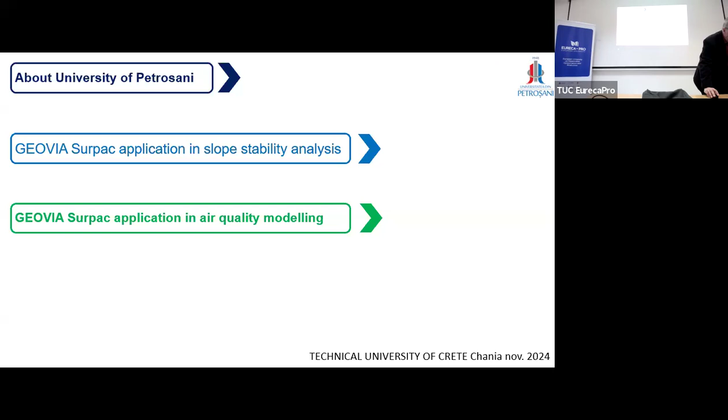So now we are here in Technical University, and I am 1,500 kilometers away from Petrosani, which is a town in the southwest center part of Romania. We hope you didn't drive all this distance. No, only by Google map - my car was an airplane. Because it's really a long trip, and now in Petrosani it's about 20 centimeters of snow.

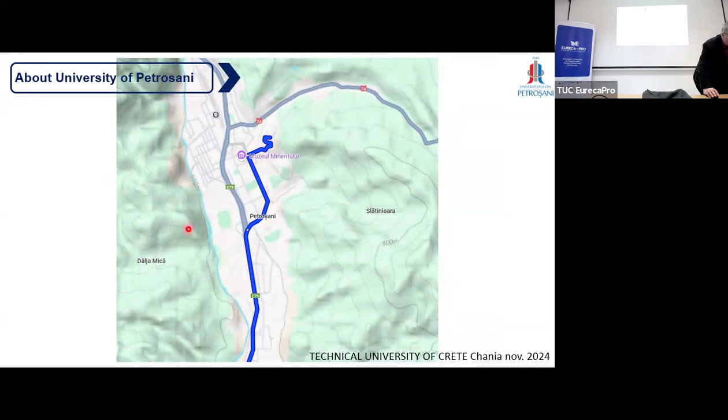Our university has functioned in Petrosani since 1948. The name of the university was changed in different periods of time. From 1957 it was named Mining Institute of Petrosani. From 1991 to 1995 it was named Technical University of Petrosani, and since 1995 we are University of Petrosani, because we have in fact three faculties which deliver various bachelor specializations.

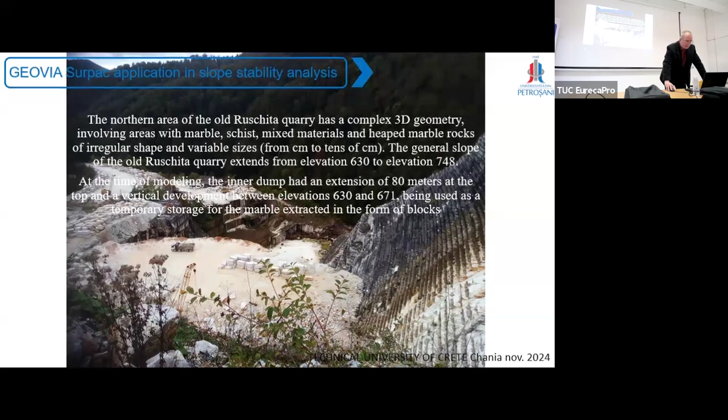For the stability study, we used Slide 3 from Rocscience. I don't know if you work with it - Rocscience has a large package of dedicated software.

So using Slide 3 involves several steps. One step is building the geometry. There are some tools inside Slide 3 for building the geometry, but these tools are not quite comprehensive to cover all the aspects. And if the geometry is very complicated, there is another way.

The geometry could be created with other modeling software and then imported into Slide 3. So in fact, we did this using version 6.9 of GEOVIA Surpac.

For building the geological model, we used a lot of various sources of information. And for completing this information, we carried out 2 exploratory drills.

One is a vertical one from the elevation 734, and the second one - one is a vertical one, and the second one is a horizontal one at elevation 688.

You could see here the core recovered from this exploratory drill. From this core, samples were made for mechanical testing in the laboratory.

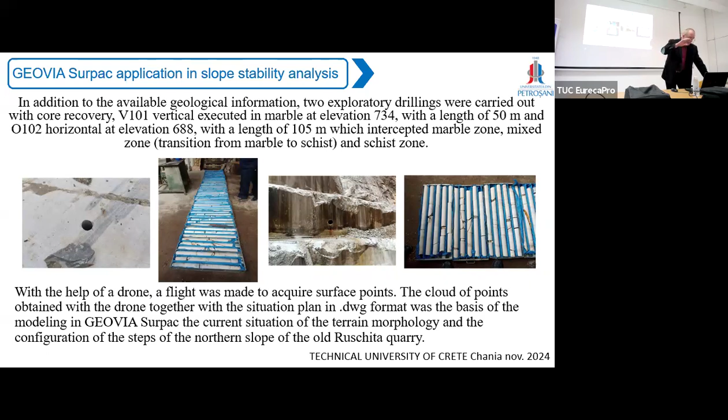Also, for modeling the morphology of the area, we used a drone, and the information, the points surveyed with the drone, were then imported into Surpac.

So this is the model generated based on the points from the drone, and here you can see where the vertical drill hole was carried out, and over here you can see the horizontal drill hole. And on the right is a helicopter view of the same area.

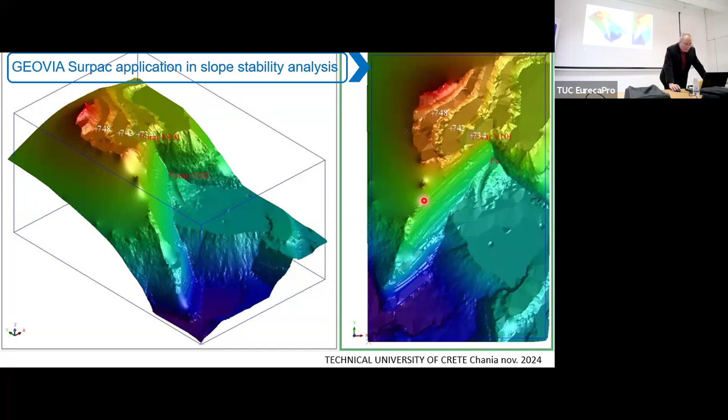So, based on the information acquired during the process of documentation, we were able to create the model of the separation planes.

This one is the separation plane between schist and mixed material, and this one is the separation plane between mixed material and marble. And you see where the exploratory drills were carried out.

In order to import the model into Slide 3, we created a virtual box, and all the elements were cut to the level of this box.

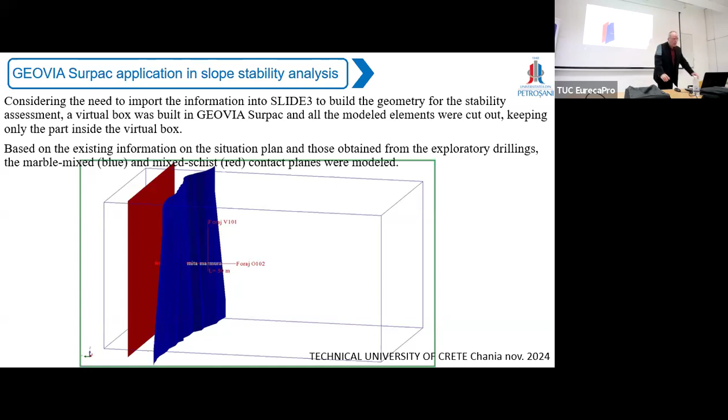Part of the slope is not visible now because it's covered with inner dump. In order to create a model of this part, we used all the situation plans with elevations and limits.

Finally, we were able to create the geometry of the area, and practically our geological model had four solids. One solid represents the marble. The second one represents the inner dump, which now partially covers the slope. The third is the schist model behind the marble, and the fourth is the mixed zone.

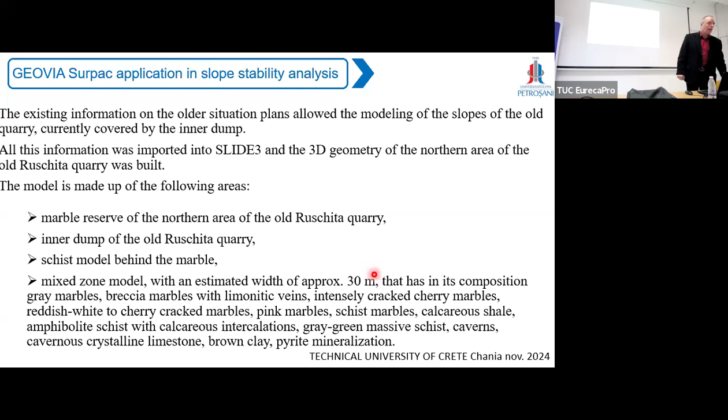We estimate that the mixed zone is about 30 meters wide. In the mixed zone, we identified different types of materials.

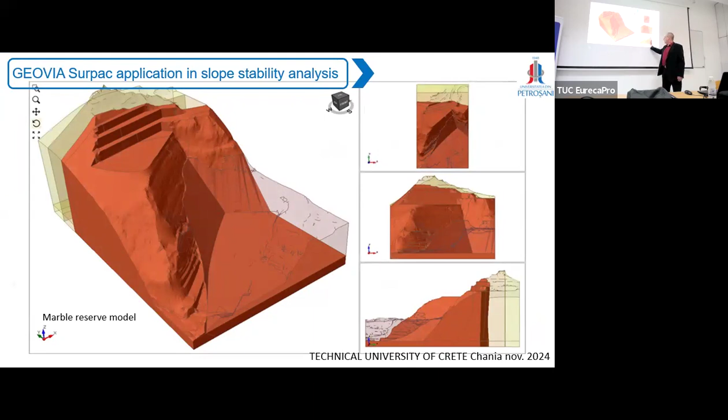And the result in SLIDE3 is this. This one is the marble model. You see, this is a 3D view, and here we have the views along axis. Here you see the extension of the marble.

The second one is the inner dump. You see that the inner dump covers the slope here. I showed you the slope on the first picture, but now it's not visible.

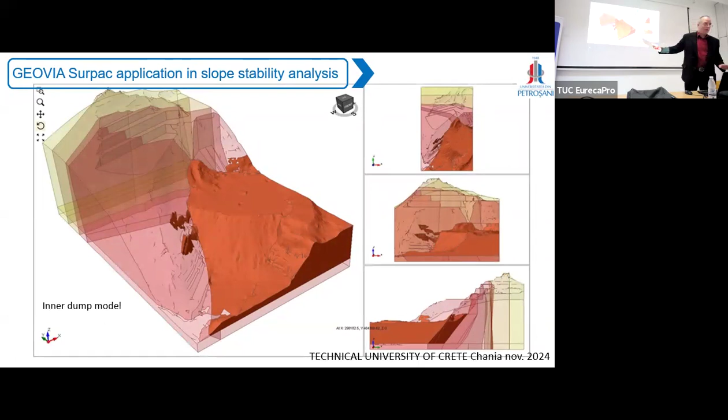The third one is the schist model, which is practically on the backside of the quarry through the mountain. And the fourth one is the mixed zone, which is between marble and schist.

The result of processing all the information shows us that in the inner dump area, it's the lowest factor of stability, 2.6. On the slopes, the factor of stability reaches over 4, and so on.

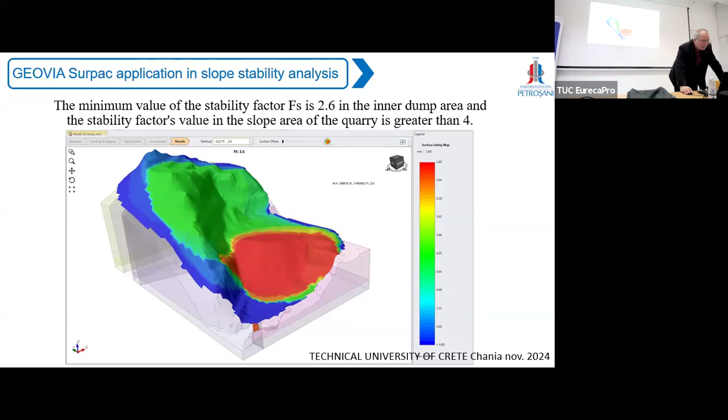So in order to increase the stability factor over a value of 3, we made this suggestion: to divide the height of the inner dump into smaller steps. This one about 20 meters, the berm of about 10 meters, and the second one another 20 meters.

In this case, the stability factor becomes 3.23. And you could see here the shape of the slope when the marble will be completely exploited.

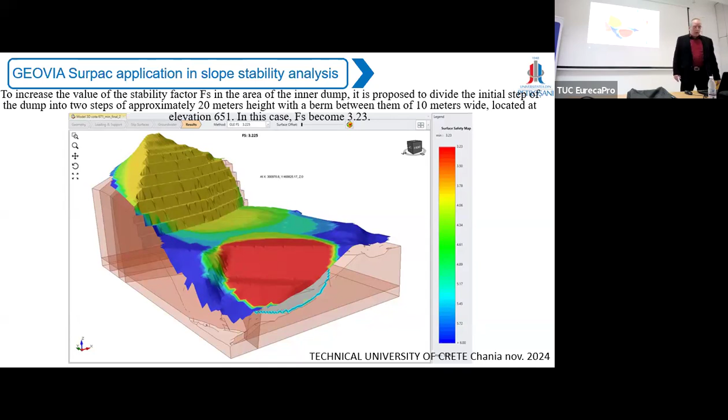So, the final slide for this topic. This picture was taken at the beginning of the study. It was taken from the opposite hill, which is also a marble hill, the so-called Galloway. You see here they started mining the marble from a marble reserve from this area.

Because here it's a commercial operation, they must gain money since no one financed them. It's a private company. The problem encountered is that the color varies along the deposit.

So in some moments, the market wants white marble. In other moments, they sell very well pink marble or white with veins. And for this reason, they started exploiting this marble reserve to satisfy market demand, to gain money.

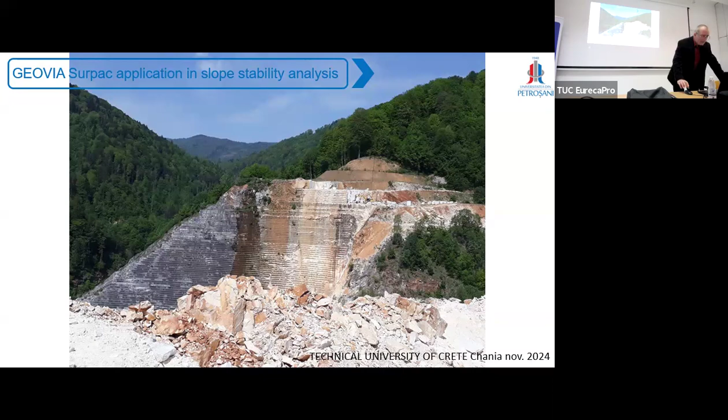So let's go ahead with the final subject of the lecture today: air quality monitoring and pollution dispersion modeling.

And we want to evaluate the air quality and how the pollutants are dispersed across the town.

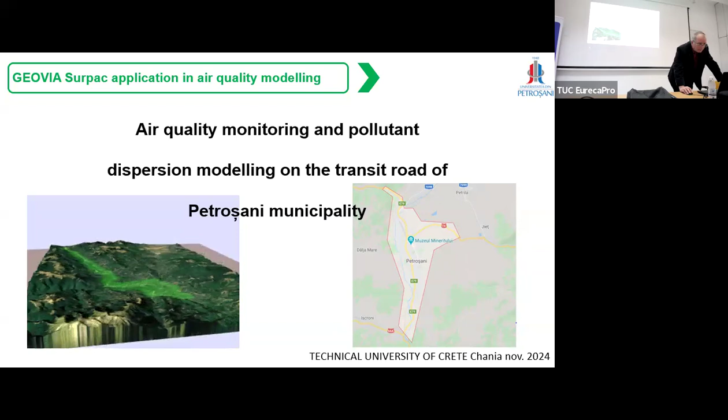First of all, we identified two main pollution sources. One is common road traffic. The second one is not so common; it's specific to Jiu Valley and to Petrosani.

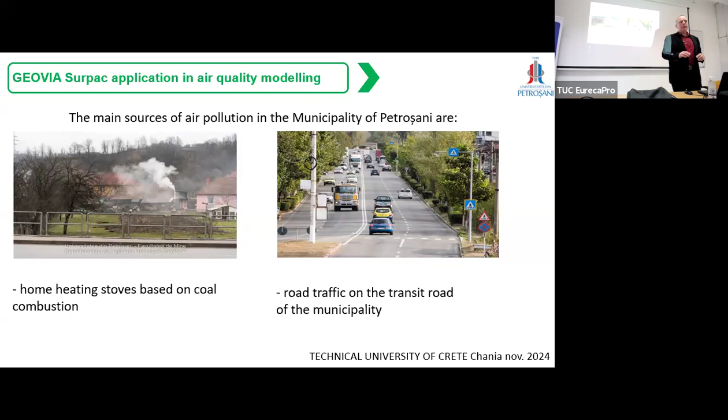Jiu Valley has a hard coal deposit, which was exploited for 200 years. Now almost all mines are closed. There are 4 active mines at this moment, but they will all be closed by 2030.

But there are some buildings, especially in the old mining colonies, use coal for heating. And the result, you could see it in the picture.

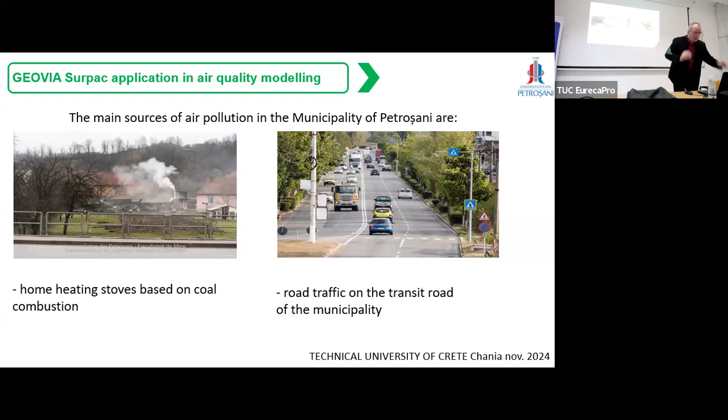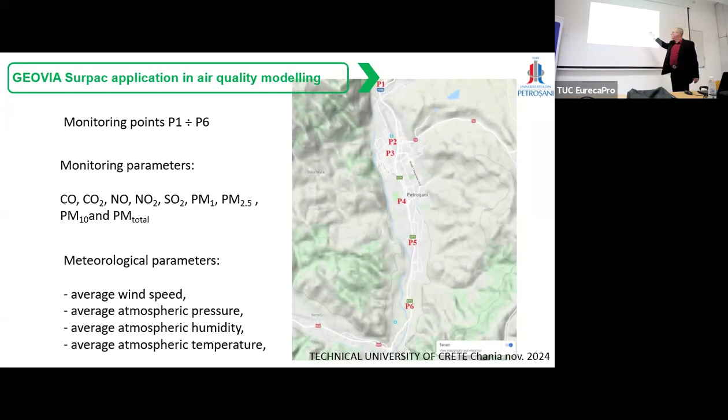Evaluating the quality of the air, we implemented 6 monitoring points along the main road which pass through the area. All the traffic must use this road.

Because you could see here on this Google Maps capture, the elevation increases both on the east side and on the west side.

So you could see the monitored parameters, and also in order to create the model of dispersion, we need the meteorological parameters: wind, pressure, temperature, and humidity.

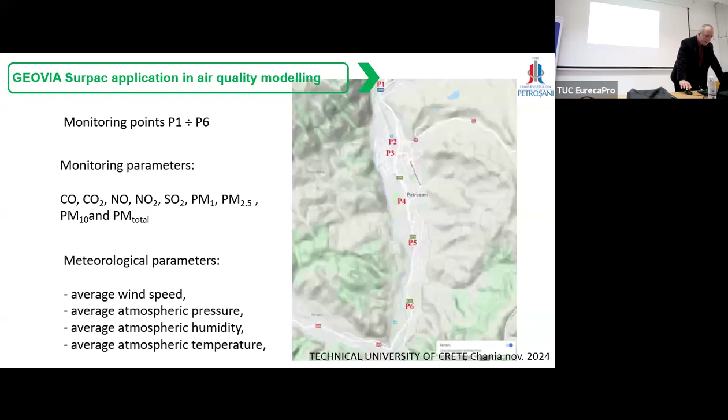For modeling the dispersion, we use METI-LIS software. METI-LIS software is funded by the Ministry of Economy, Trade and Industry from Japan, and the Research Center for Chemical Risk Management. We use version 2.02 of METI-LIS because it is translated in English and available on the internet for downloading.

Basically, the interface of the software is quite simple and allows users to enter the pollutant, the pattern of source operation, meteorology parameters, and the map of the area; to define the coordinates of a point source, or define the line source type; and to simulate buildings like blocks on the map.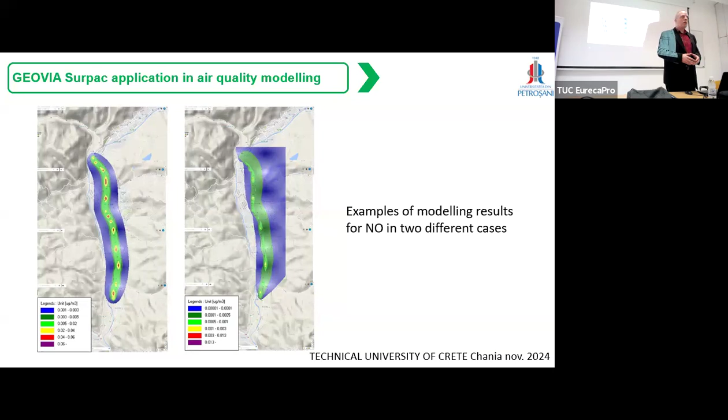So this was my short lecture about the subject, and now I await your questions. Thank you.

First of all, thank you very much, very interesting. I hope that our students will also see the opportunity of applying mining software to environmental issues. An existing software is not built explicitly for a specific use; it can be used for several different applications. And it's important because we know that the mining industry is very rapidly transforming to a digital one. So the use of this software is essential for young students.

I don't know what your opinion is about it. It's like walking in the park, knowing software now. Yeah. Now, regarding the subject you have presented, I would like to ask about the second case.

You mentioned that this program also needs some data regarding the buildings as blocks, as solids. I wonder if you modeled buildings with some kind of software, or Surpac. No, buildings can be introduced very simply, like a rectangle with elevation. So it's not necessary to use another software for modeling, because you don't create all the doors and the windows of the building. Practically, it's only a solid. Yes, solid. Okay. Thank you very much. Thank you.